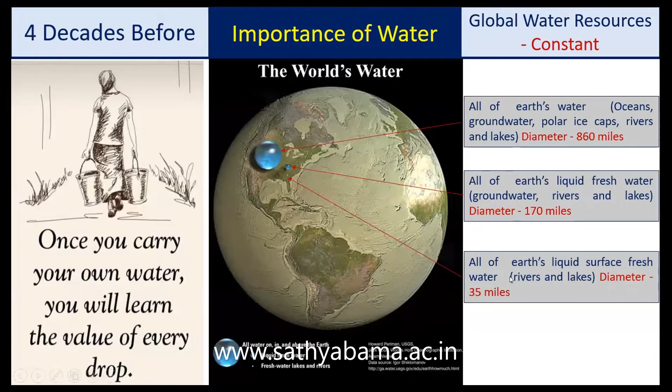Now, the other part of the importance of the water source: if you assume the total water available in the world is 100%, nearly 97.5% is salt water, and only 2.5% is fresh water. Within the fresh water, approximately 80% is glaciers, and 20% goes to groundwater.

Within that, you have lakes, rivers, and soil moisture. Then further, water vapor and water in rivers and living organisms, so we are enjoying water only from rivers and lakes. So you see, from 100%, what a meager amount we are having and enjoying for so many years.

If the entire 97% of water available in the ocean were fresh, potable, drinkable water, we would never talk about the water source at all. Whenever any commodity or resource becomes scarce, only then do we talk about its importance. In such a way, the water source is also one of the scarce resources for the growing population and industrialization.

So this is the indicator: the global per capita water availability. If you see here, California, Canada, South Africa, Brazil are rich in water source, and even China and the northern hemisphere. But in India, we are almost in the stress to scarcity zone.

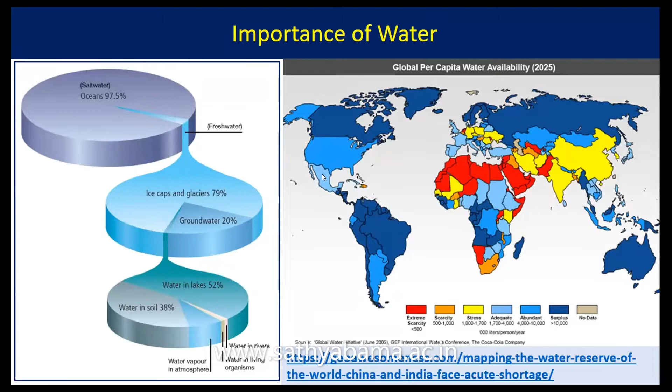But is it going to be an increasing trend or a reducing trend? That's a question mark. But due to technological and human interventions like construction of additional dams, canals, aqueducts, and pipelines, we have somehow managed to bring the original stress condition to an almost manageable state.

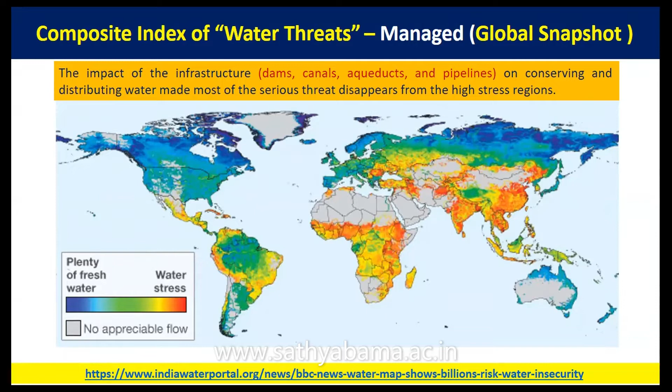But still, population growth is one of the hidden threats. The demand is directly proportional to industrialization as well as population. Of course, population growth is the main cause for food security, industrialization, and so many other commodity demands.

Then the consumption of water can be classified into two ways. One is consumptive use, the other one is non-consumptive use.

Suppose you have a glass of water and you use 50% or 70% of it. If you are not using the remaining water, it goes to waste. But whatever you consume, say 50%, is called consumptive use, which is not available for the hydrological cycle immediately.

What I mean is, suppose this water you are drinking, a portion will be used for your blood cell or body cell development. Or if you use this water for plant growth, not all of it transpires. Most of the water will be used by the plant for photosynthesis as well as plant cell development. That water will remain with the plant or the human body cell until it lives. Once it dies, it goes back to the hydrological cycle.

So for the time being, this is called consumptive use, which is not readily available for the hydrological cycle, but it is still part of the hydrological system.

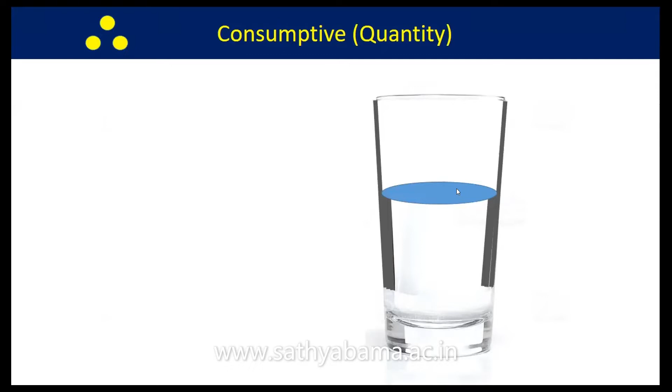Therefore, it is very important to use water judiciously without wasting it. This is not a new or future picture, it's already been experienced by most of northern India, like Gujarat, Rajasthan, and so many other places.

So kindly don't waste water. Whatever is possible, pour only that much into the glass and drink it. Make it a habit to keep your glass empty wherever you go.

In terms of quality, though we have water, if you try to pollute it, it is still not usable for drinking, agriculture, industries, or any other purpose. So though the water is available, it is not available for usage, which is also a kind of consumptive use, or you have consumed it. It is not available, but it is still part of the hydrological system.

This is the present situation the world is facing. We had water in rivers, lakes, and so many places, but we have started polluting all rivers and lakes, most of developing nations have started polluting the lakes and rivers.

Now we are using technological measures to treat and drink it, like desalination, RO, primary treatment, secondary treatment, tertiary treatment. So rather than eating straight away, we are eating after rotating the hand across the head, so to speak.

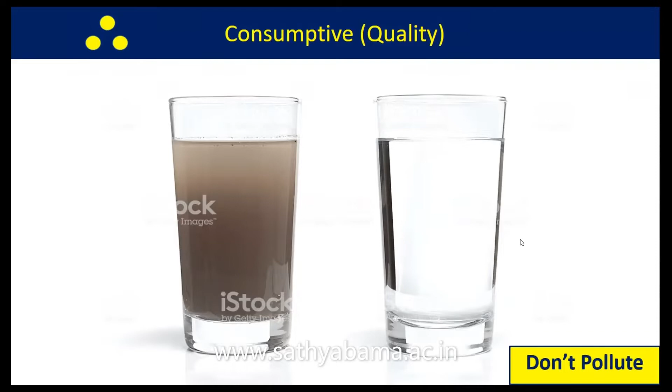If you make a fair judgment on utilizing water and keeping it as a precious resource, and make sure you are not polluting unnecessarily, then the resource will be saved and water management becomes very easy. So therefore, don't pollute. Now this is the global domestic, agriculture, industrial and domestic sector consumption.

This is one of the interesting pictures you can see. You can live in the world without a car, without gadgets, electronic items, or luxury items, but you cannot live without water and food. If you see here, India uses almost 93% of its water only for agriculture, and domestic and industrial use is very low.

If you talk about developing versus developed nations, like Germany, USA, Europe and UK, these countries are highly developed in terms of technology, and you rarely find them producing food, but their industry is huge. That means they produce technology, sell it to other parts of the world, and take food from countries like Southeast Asia.

If you see in this zone, most of the water is utilized only for food production, and the Western countries enjoy their lifestyle by taking food from us, while we enjoy a so-called luxury lifestyle by taking technology from the West.

So there is an imbalance of usage of water. What I'm trying to say is the importance of what is called virtual water trade. If you use 1 meter cube of water for producing an agriculture product, let's say paddy, you can produce 1000 kg of grains, which cost nearly 10,000. But German or Western people will use the same 1 meter cube of water and sell their product for 25,000 or 50,000. So the same water used here sells for 10,000, and there for 20,000, 30,000, 40,000. That means water is made into an economic good.

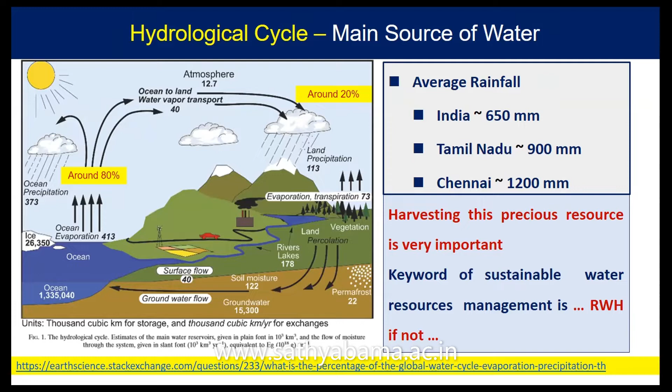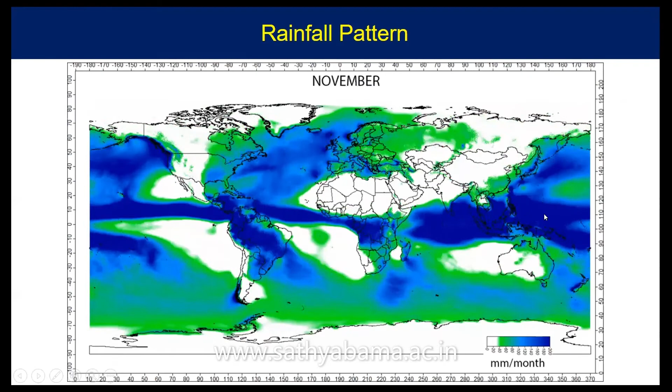So this is the rainfall pattern across the globe. You can see, right from January to December, the maximum precipitation occurs almost like at the equator. That's what I said - across the whole globe, either the rainfall or the drought generally takes place near the equator.

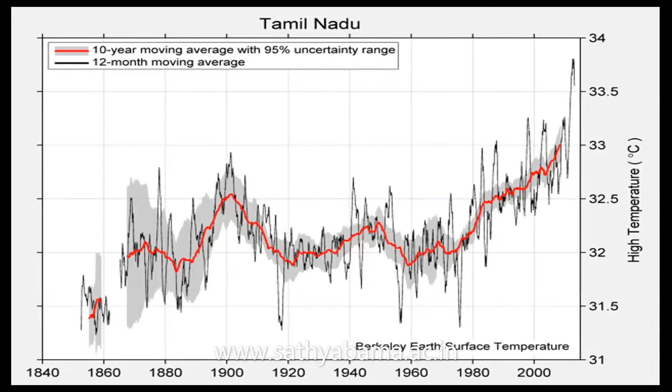Maybe I'll show you some glimpse of the impact of temperature rise, nothing but global warming, on water resources.

The total water surface available in Tamil Nadu is from 17 river basins, and we normally refer to it in terms of 1 TMC. 1 TMC is 1,000 million cubic feet, that is 10 to the power 9. That is the unit we normally use.

In Tamil Nadu we have 17 river basins, estimated as 850 TMC. From all of this, we have 39,000 tanks catering nearly 347 TMC, 79 reservoirs in terms of dams contributing 240 TMC, interbasin transfer contributing 261 TMC, and other storages contributing 2 TMC. Whereas the surplus water from the 17 river basins goes to the ocean without conservation, estimated at 177 TMC. The annual average potential was estimated as 1643 TMC in 2001, but the demand was 1921 TMC.

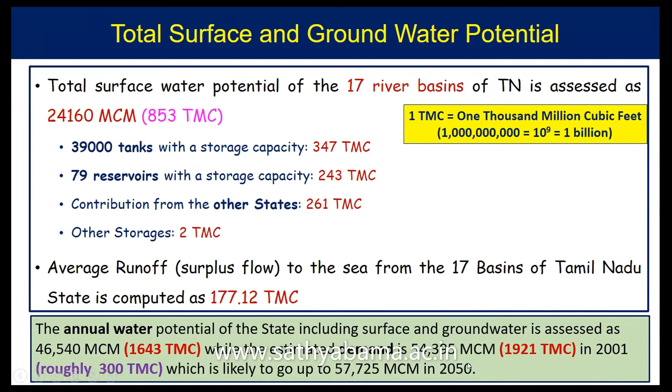There was a gap of 300 TMC in 2001 itself. This gap is likely to exceed up to 57,000 MCM by 2050, due to globalization.

This is the drought-prone area of Tamil Nadu, generally Ramanathapuram, Dharmapuri, and other northwest regions of Tamil Nadu, while the southeast of Tamil Nadu is generally...

Excuse me, can you wait for a minute? Yes, sir, yes, sir, we will wait. No problem. I'm really sorry for the inconvenience. No problem.

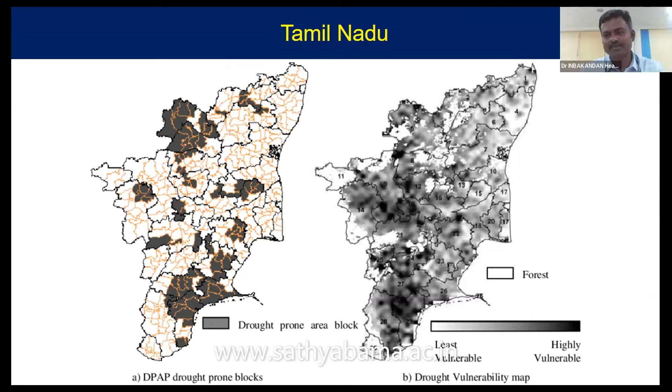Right, so this is the drought portion of Tamil Nadu. And if you see here, across India, this data is released by the Central Groundwater Board.

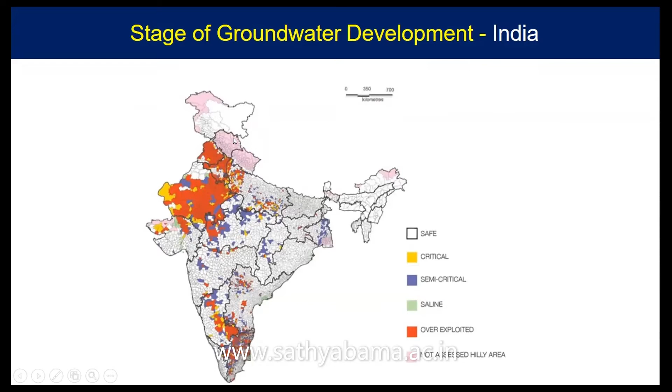Punjab and certain portions of Telangana and Andhra Pradesh are highly overexploited, because in the 1980s the borewell concept came into picture. In Punjab, these wells were highly utilized through the borewell concept, and these are the highly exploited blocks as of now. Other portions of India are mostly semi-critical to critical.

Now, the various water users: if you see here, irrigation involves farmers, domestic use is by local communities, industries use water for their purposes, and there's also the recreational aspect, generally for tourism. Without water, tourism will never flourish.

For example, Netherlands is meant for tulips, and we have a lot of canals there. If there is no water in the canal, there is no tulip. Similarly, if there are no trees in Ooty or Simla, or no snow in Kulu Manali, then there is no tourism. So water plays an important role in tourism development, which gives refreshment for human health.

Another important aspect is environmental flow. In the National Water Policy of 1987, we never had national environmental flow as a component, but when it was revised in 2012, environmental flow became one of the major and mandatory components included in the National Water Policy.

The importance of national environmental flow in the water policy is that if a river does not receive or carry a minimum flow for at least some portion of the year, the flora and fauna existing in the river system may disappear over time. So to ensure that the flora and fauna, which are fundamental to any ecosystem, are taken care of, a minimum environmental flow must be ensured so that the ecosystem is saved.

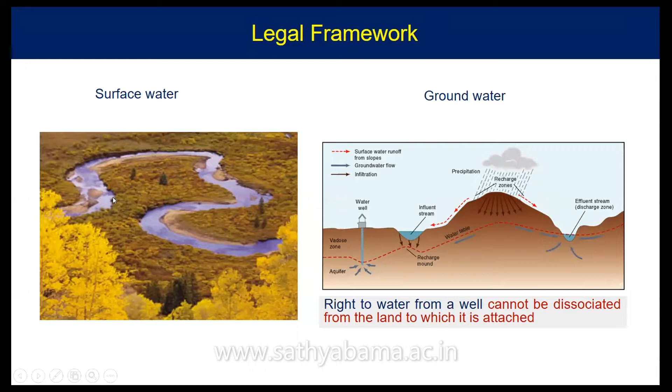The difference which is available, and the land right—your groundwater right goes with the land right, whereas your surface water right never goes with the land right.

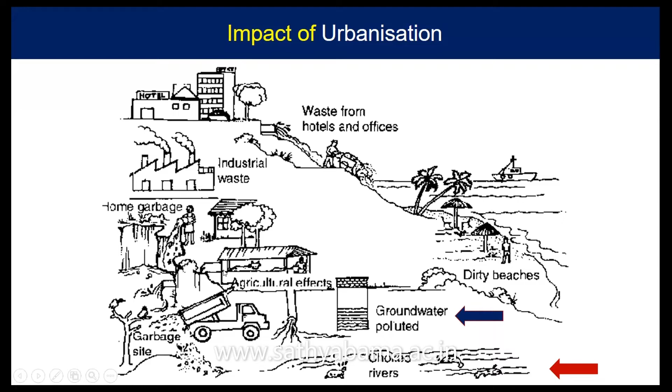Regarding surface water pollution, the river generally has a tendency to show an oxygen sag curve and recovery curve. The dissolved oxygen (DO) level of a healthy freshwater river system is typically 8 to 9.2 ppm or milligrams per liter. If the DO level goes below 2 ppm, the fishes and flora and fauna will die, and the system becomes a dead system. The DO level of a river or lake system should not go below a certain extent.

But nature has a gift: if you don't pollute for a certain period, the system has a regenerating capacity and will come back to its original shape. You must wait for that. Otherwise, if you dispose of another pollutant source, the curve will decline again, and the river system or ecosystem will become a dead ecosystem. This is one of the biggest problems in developing nations, especially countries like India, China, and other Southeast Asian nations.

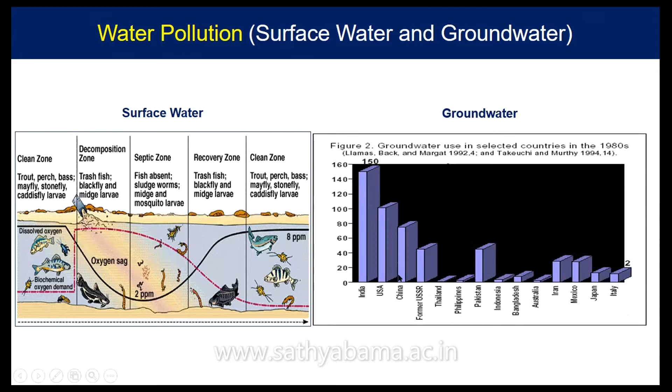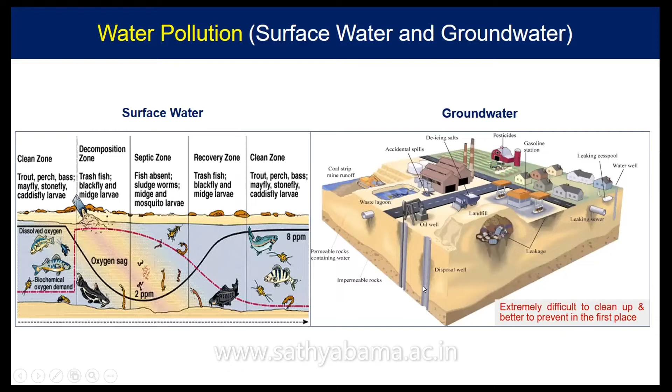Regarding groundwater, India is a pioneer in using groundwater sources, while other countries use much less. Since we use more groundwater, we are also polluting it through improper disposal of liquid as well as solid waste. It is extremely difficult to clean up such a system, so it is better to prevent pollution at the beginning.

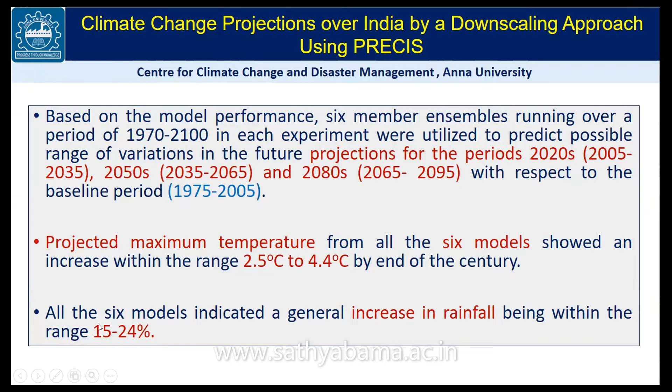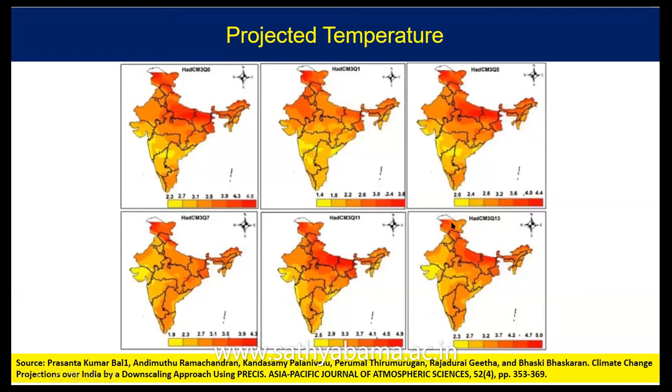The projected maximum temperature from all 6 models showed an increase of 2.5 to 4.4 degrees Celsius at the end of the century, based on this projected result. Apart from that, rainfall increase was also observed, from 15 to 24% in most of the Indian context. This shows the temperature projection from the baseline to the projected period, 2.5 to 4.4 degrees, and the rainfall pattern increase from 15% to 24%.

If you talk about the climate change impact, the Krishna, Godavari, and Ganga rivers are the maximum benefited river systems, in terms of rainfall increase or annual flow increase in the river.

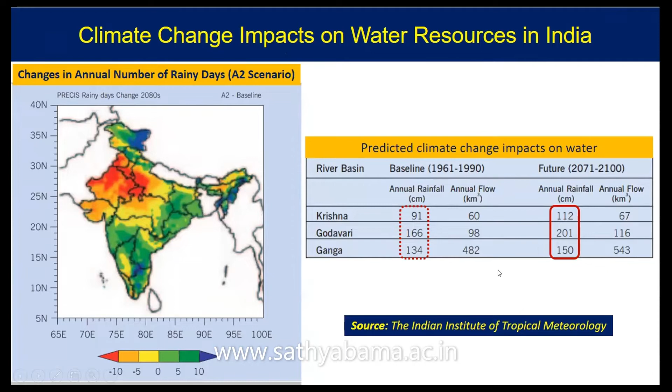Now coming back to South India, IIT Madras along with Tamil Nadu Agriculture University carried out a study to assess the likely rainfall scenario in mid-century using a climate model with support from Norway and the government. They used GCM and brought it down to RCM level, which was run by the International Pacific Research Center in Hawaii, with 25 kilometer resolution, by doubling the CO2 emission value.

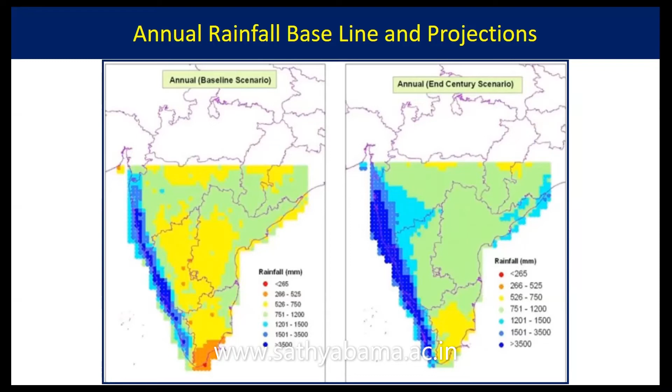And here you can see the western coast is highly benefited by the rainfall, by the climate change. And this is the other thing, at the end of the century.

The number of rainy days is reduced by half. For example, in the baseline period, in a year, if you get rainfall on near 90 to 120 days, maybe at the end of the century you will get only 45 days maximum. Within that, you have to conserve and utilize the water.

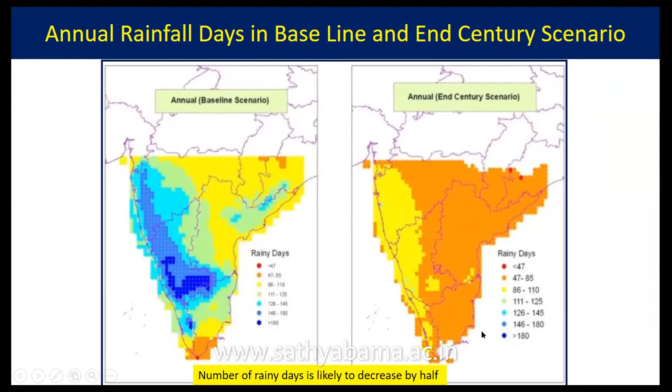The other way, the intensity also changes. Intensity means millimeters per day. Initially we had like 7 to 10 mm, now it's going to 11 to 12 mm, or 7 to 12 mm. There is an increasing trend in rainfall intensity also observed by the end of the century.

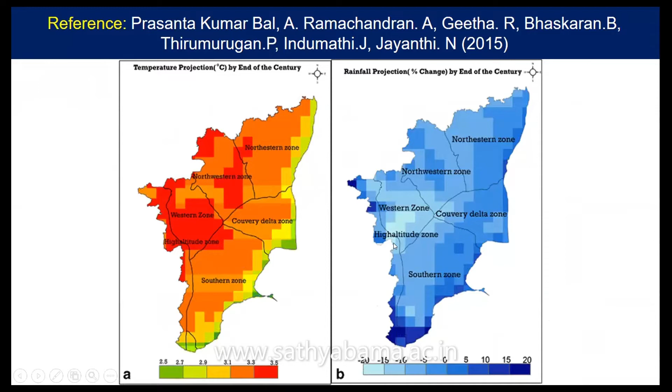So that means in Tamil Nadu, the east coast has an increasing trend, whereas the west coast has a declining trend in terms of rainfall as well as precipitation. So this is a summary of what I already said.

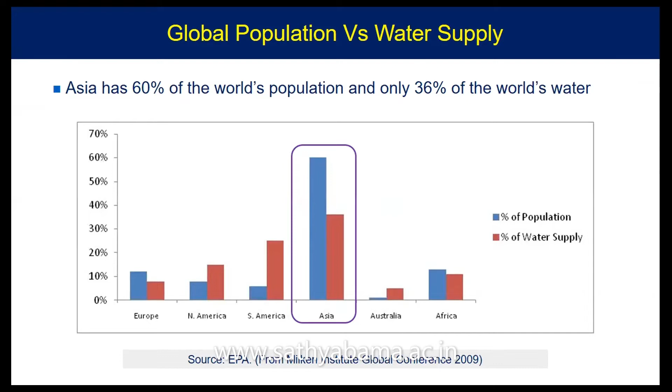Now if we come to Asia's water availability - world population versus 36% of world water is available, and see the demand in 2050. The huge gap existing between population versus supply is one of the important indicators one has to think over, to manage water supply to meet the entire population without any deficit.

So therefore water management is becoming an important commodity. It is basically active planning, development, distributing, and managing the optimum use of water resources, which is the important commodity.

Whereas it is not that easy, because any water management involves physical science, social science, and basic science. That means you require interdisciplinary people to make a decision, like geographists, geologists, economists, social scientists, physics, chemistry, biology. So bringing everybody together and addressing the issue is the biggest task.

That's what in recent days they renamed as the IWRM concept, which is called the Integrated Water Resource Management concept.

Water management has different dimensions. You must address water resource management in terms of equity, efficiency, sustainability, legitimacy, accountability, subsidiarity, and participation. These are the different dimensions that water resource management generally has, and you must address all these issues.

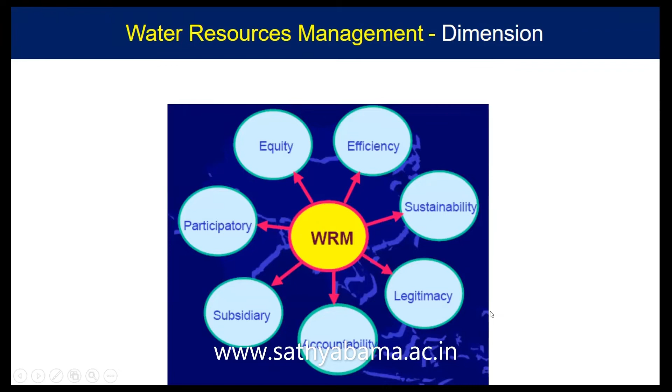Coming back to some of the management measures - a shift in thinking is required to manage water resource management, moving from simple water management towards sustainable management. As I said, the concept of IWRM, Integrated Water Resource Management, needs to be inculcated or introduced into water management practice. Then the blue-green water concept must be taught at all levels for conserving water. Surface water management, wastewater resource reuse is the future - it is the order of the day, you cannot escape from this. And if you are not doing proper management of the above items, then stormwater management becomes necessary.

And the new principle, right? The new principle of sustainable water management planning is to identify and meet the basic human and ecosystem needs.

One has to treat water as a basic need in terms of food self-sufficiency and self-reliance. So water must be treated as an economic good. Only then can you meet both these points.

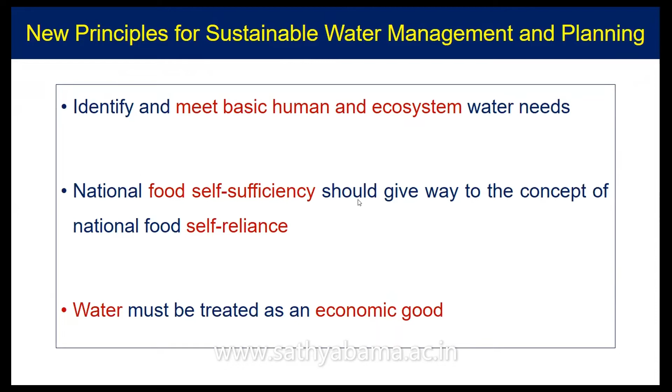To address all these issues, the IWRM concept is the recent concept, called the normative concept. It is an ideal concept, bringing political, engineering, social science, economics, and environmental people together to make a better triangle, a better water management system. So policy, legal regulations, aquifer and river basin management, central and local assessment information, so many things come into the picture. IWRM is the recently practiced concept for water management.

Then blue-green water is another concept. When precipitation takes place, generally 65% goes as evaporation and evapotranspiration, and 35% goes as runoff. We cannot do much about this apart from constructing check dams, dams, reservoirs and other structures. But you can conserve some percentage of the green water, which goes to the atmosphere through green cover in terms of evapotranspiration.

So if we try to change the agriculture practice, the cropping pattern, from high water-consuming crops to low water-consuming crops, then you can conserve at least 5% of water in the green water, which is a huge saving for the entire globe. So conserving water by changing the cropping pattern plays an important role in water management for any river basin or any country.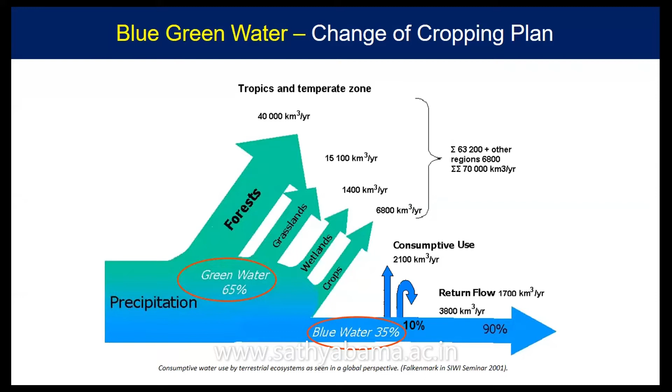In entire Tamil Nadu, we have 39,000 tanks, and if we use these tanks properly, we never face water scarcity at all. This is one of the indigenous geographical features that South India has. Nowhere else in the world is this kind of cascade of tanks available. We must be thankful that they were given to us, but we have to use them properly to conserve rainwater whenever it takes place. I'll come back to the Urani later.

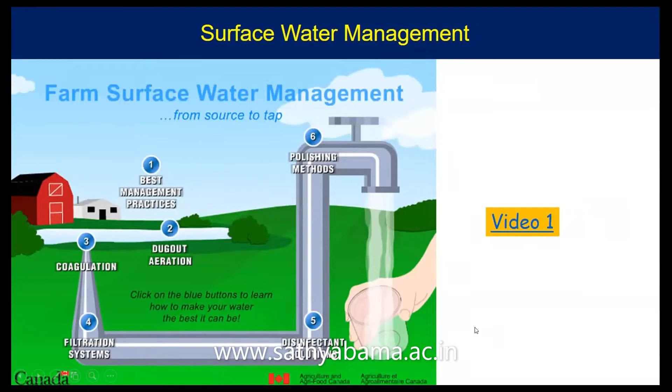I have how much time? No issue, sir, you can continue. Okay, right, you can.

Now these are some traditional rainwater harvesting methods practiced in India. The Zing in the Ladakh region, and the Kul in Himachal Pradesh. Likewise we have methods in Uttar Pradesh. For Nagaland, it's the Zabo. So in each part of the country, they practice rainwater harvesting under different names. For example, in Tamil Nadu it is the Urani. In Kerala, it is the Surangam. In Gujarat and Rajasthan, it is the Kunds. So this is practiced across the country, but we are often not aware of what it actually means. Just Google it and you'll get a beautiful image of each one.

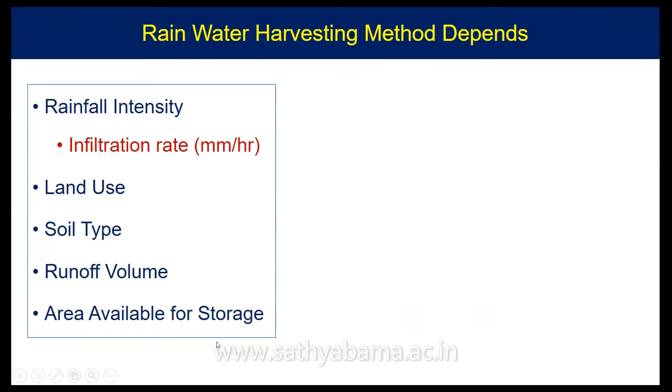One has to understand how much soil infiltrates, how much runoff will generate, how many storage structures are available, how much water you can store, or how the excess water can be stored nearby. Those kind of activities you can take up.

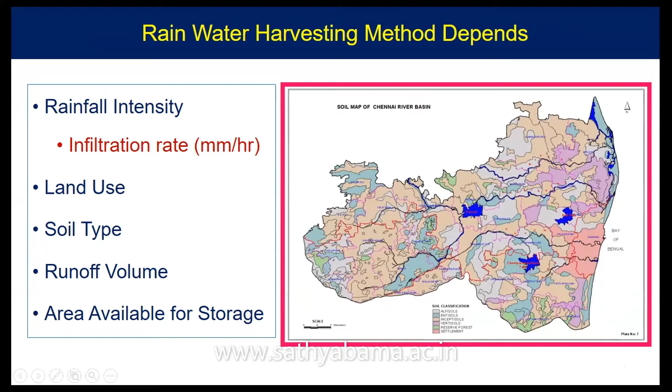When it comes to groundwater management, we have artificial recharge, groundwater protection zone management, subsurface reactive barriers concept, and pump and treat injection system. These are the management strategies.

In case of artificial recharge, you can improve water quality by injecting treated wastewater, and you can dilute or push the salt water into the ocean and prevent seawater intrusion through injection.

Coming back to wastewater reuse as an option - as I said, if you are not doing rainwater harvesting properly above, there is no other option. We have to depend on technology and use it, because the world wants to push technology to the consumer and make the public addicted. So if you are not following the traditional practice, then you must fall in line and do wastewater reuse.

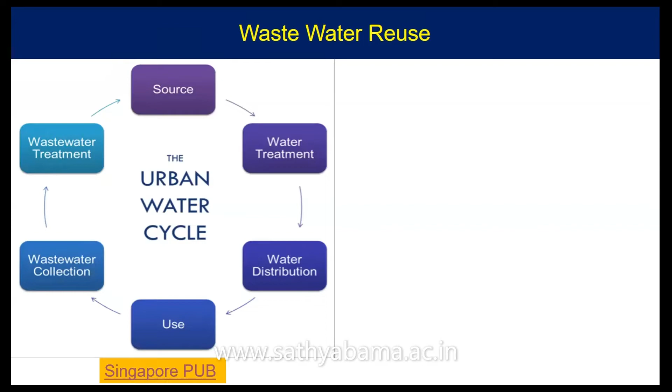Let me just check whether this video is playing. Is it coming? Video visible? No sir, it is not visible. If you stop sharing that, I think the video will play - stop share. And while sharing, we need to click the bottom two rectangle boxes also, for audio. Is it visible now? No sir, only the PPT slide is visible. You have to completely close this PPT, sir, then only we can see the video. You can stop share, then start share again. Sorry, it is not coming, I don't know.

Or you can take the video on the desktop. What's the name of the video, sir? Maybe it's hyperlinked - oh, you hyperlinked it in the slide itself, right? Must be here.

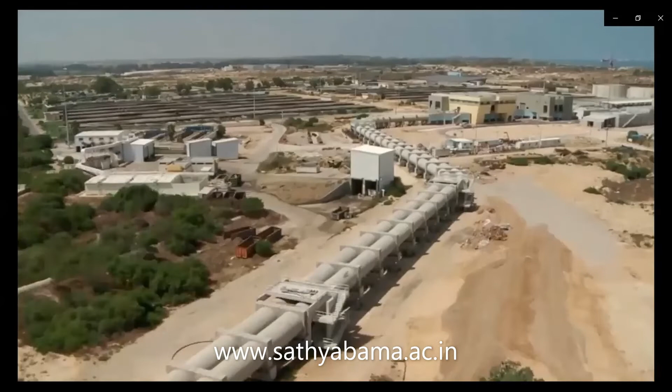It is a water saving technology in Israel. We recycle 85% of the wastewater, which makes us a world leader in water reclamation. We can create this agriculture to the south of our country with water coming from wastewater. Wastewater is so important and critical for us, being an arid, semi-arid region, we have to use wastewater resources for irrigation. We take the wastewater from our homes, bring it to wastewater treatment plants, and use 80 to 85% of our domestic wastewater for irrigation and agriculture. This is the highest number you can find in the world.

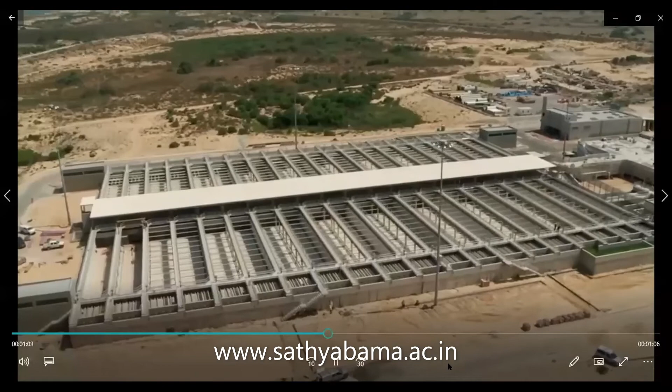We're collecting the wastewater from 2.5 million people in that region, the center of Israel. We're bringing it to the Shafdan, one of the world's largest water reclamation plants, and we recycle 99.8% of the wastewater back to the level of potable water that you can actually drink, shower, or use for agriculture, as we do. We collect the wastewater through big pipes.

They come here. We take out the solids, recycle it, and then into the wastewater we insert microorganisms. The microorganisms digest the organic material and purify the water. At this moment we get effluent of very good quality, but for unlimited irrigation.

We believe that the experience gained in Israel in the different directions of being more efficient in water use, saving water, and producing water from new resources can be shared in many regions in the world.

Right, so now my PPT is visible. So this is the technology, and the annual average rainfall in Israel is less than 400 mm. So when they are capable of doing all these things, why not other countries also, right?

So they are the pioneers because they want water. They buy it from nearby countries as wastewater as a source, and they treat it and use it.

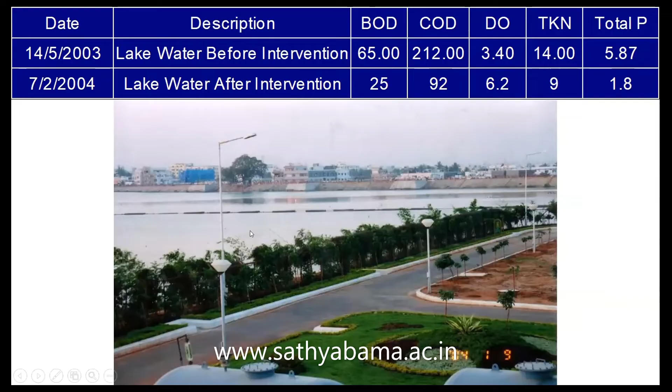Then upgrade the sanitary fixtures to consume less water, and eliminate single-pass cooling. Don't allow the water to exit from any industries after a single usage. They have to use it multiple times, do multiple processes, then only let it out.

Incorporate landscape irrigation and reduce steam sterilizer tempering water. Again, it's almost similar to eliminating single-pass cooling, and reuse culture must be in practice. Control reverse osmosis system operation—we should have a good RO system with membrane technology so that we minimize the RO reject from the water plant.

As of now, we have 40 to 60% as a reject. We should have 90% water purified and 10% reject. Then that is a good RO system.

And recovery of water—as I said, rainwater will come into the picture. Then finally, the recovery of air handler condensate. In recent days, some people are condensing the air moisture, converting it into water as droplets.

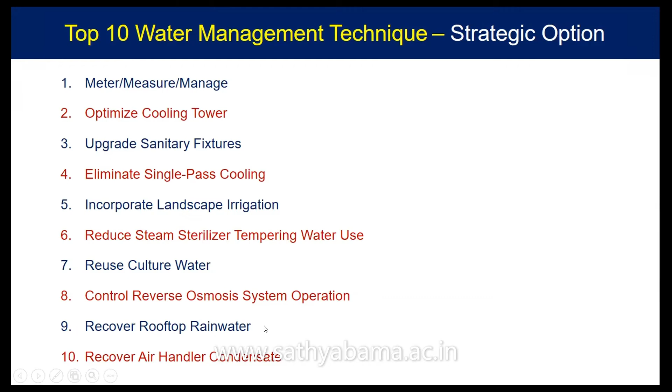So this is the metering advantage—you just meter it, and basically you have a sensor. The sensor will tell you the soil moisture. Once the soil moisture reduces, the irrigation will start. Otherwise, you flood it and unnecessarily make irrigation. That is the basic concept of meter usage and consumption.

Then the optimized cooling tower. In those days we had wooden or concrete-based cooling towers, which consumed a lot through leakage and other issues. Now we have composite material cooling towers, which consume less water for cooling and other purposes.

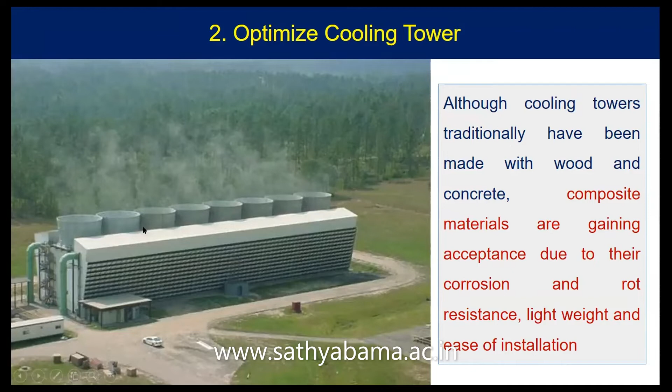Then the sanitary upgrades—in recent days, almost all accessories are giving nearly 40 to 100% savings of water. Let's say a water tap goes from 10 liters to 6 liters per minute, that's efficient. As technology increases, we must also go with the technology; only thing is, you have to pay for it.

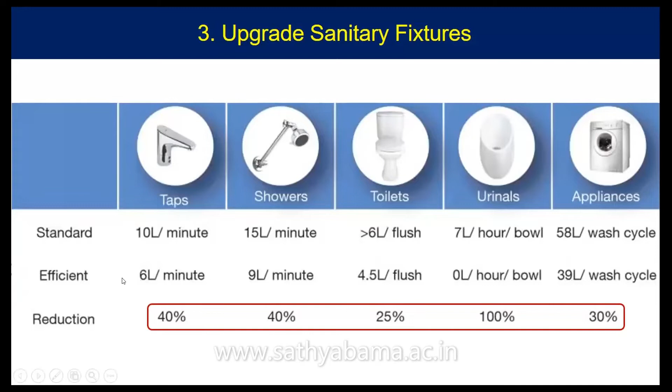And one of our alumni from MIT, his name is Arun, has developed a nozzle which converts a single droplet of water into n number of droplets of water.

The concept is to bifurcate a single droplet of water into n number of droplets, so that small particles fall on the hand before you wash freely. What the hand actually requires is wetting, and for wetting you need not have a bigger droplet. Only a small droplet is sufficient, like the sanitizer machines where you show your hand and it sprinkles - that is sufficient, rather than pouring water on the hand and wiping it. This invention proved a 90% saving, and now most hotels are using this kind of technology. It was patented recently, maybe around 2000.

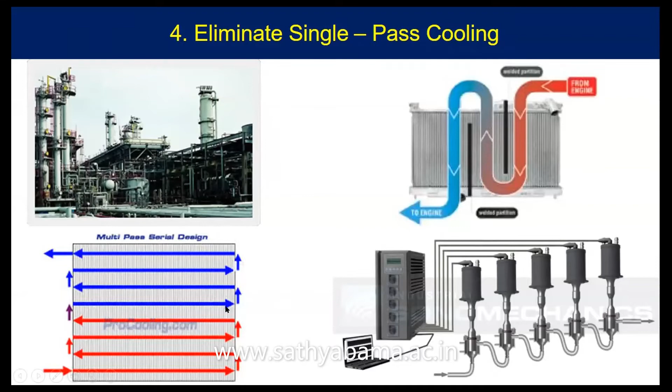Eliminate single pass cooling, you must repeat the cooling process several times. The incorporated landscape irrigation practice is one of the best practices which Sathyabama is following.

We collect all the wastewater and have a treatment plant near our environmental department, with dedicated faculty to treat the water and maintain its quality, ensuring it is treated to at least agriculture standard. Most gardens in the campus are irrigated only by treated wastewater. A couple of years back, at the Srirangam temple in Trichy, the entire lawn and gardens within the temple were grown only using treated wastewater generated within the premises, and those flowers were taken to the god. You can Google it and find the video.

Then there's reduced steam sterilizer tempering water use - as I said, you must use advanced technological instruments to minimize water, and you can save 30 to 40%.

Then the reuse culture, as I already said, you must collect water from the restroom, toilets, and cafeteria, treat it and filter it, and use it for toilet flushing.

In recent days, most CMDA authorities are giving permission for buildings only if you have a dual pipeline system - one for domestic purposes, and the other for flushing and urinals, wherever physical touch of water is not ensured. There you can use treated wastewater. So they are insisting on dual pipeline systems in most apartments.

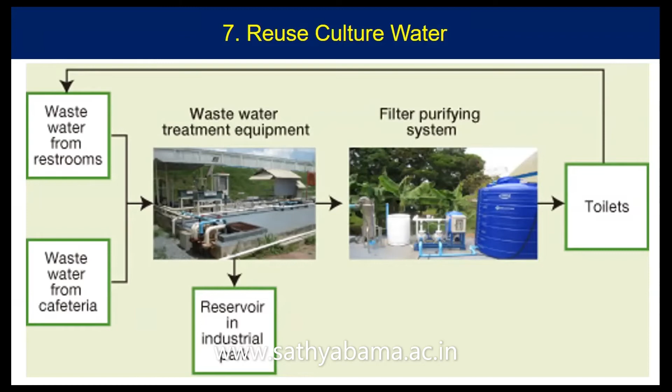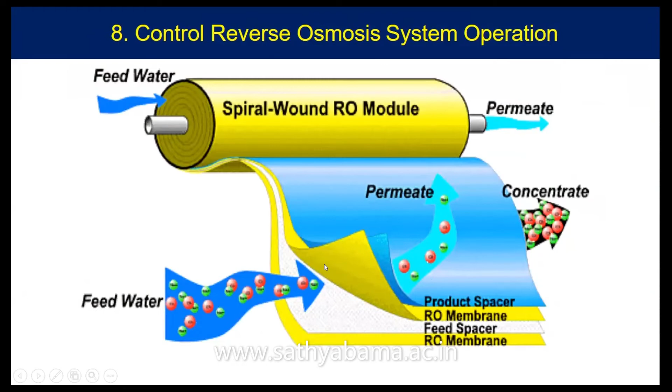As I said, you must have a good RO system and membrane system to minimize the RO reject, because the RO reject is the brine and it has a lot of impact wherever you dispose it.

Recovery of water from the rooftop - if you talk about Karaikudi and some Chettinad areas in Tamil Nadu, that is the best place to make as a model for rainwater harvesting. Even scholars from France and Germany come to do research on the rainwater harvesting practice being practiced over time in Karaikudi, Chettinad houses.

So if you try to harvest water from the roof wherever possible, store it at ground level and use it whenever you want. Even Shivakumar from Bangalore, who I think is a pioneer in rainwater harvesting, is a known friend of mine, and he built his entire house depending only on rainwater throughout the 365 days of the year.

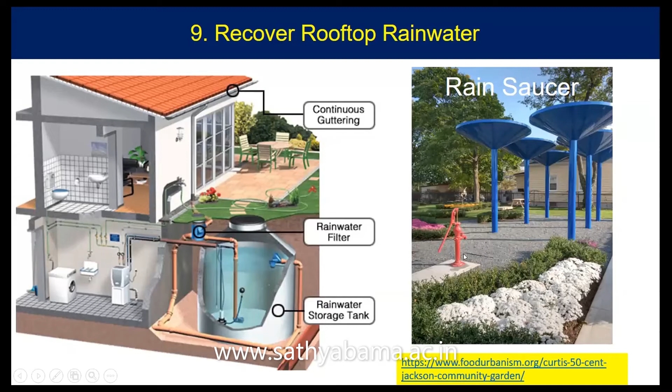If you are not doing this, there's also a recent technology called the rain saucer, for use in parkings. Instead of an umbrella-like shape that protects from the sun, it's reversed - it still protects from sun but also receives and collects water for use in the garden. This rain saucer is currently used in most developed nations for lawns and gardens, and to a certain extent for other demands, so you need not irrigate - it automatically takes care of it.

You can collect and use this water too. In 2000, Richard Heinichen proved to the world that bottling water need not always come from extracting groundwater - he proved that the bottled water business can also be done by harvesting rainwater from the roof.

As I said, the rain saucer harvested water from 1,000 square feet of land or rooftop, with a 3 cm rainfall yielding 2,000 liters. It was given a mild treatment like UV treatment and reverse osmosis before packing, making it wonderful potable water, the most wanted or preferred water because it's virgin water.

There is no contamination because it was just collected from the atmosphere a few hours earlier, so it's the most preferred or demanding water. In fact, each 500 ml bottle of water contains 53,300 droplets within it. And you can save so much water even in a small area of 1,000 square feet.

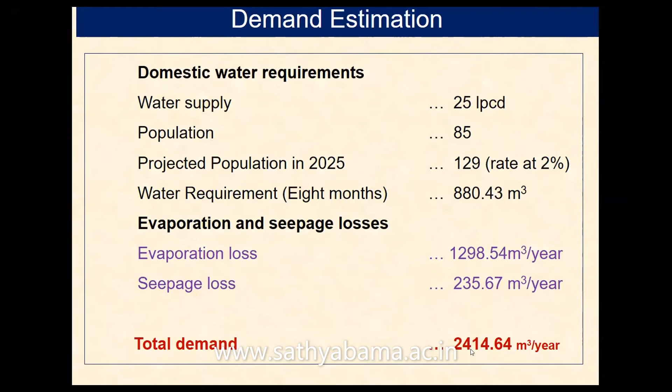The Oorani was jointly done by the Government of Tamil Nadu, CSCWR, and DHAN Foundation, and basically we designed it. We took a small Oorani in Kancheepuram district near Chengalpet. We estimated the total demand of the village is 3,000 something, and for 9 months the demand is 2,400 meter cube per year.

This is before renovation. We took only 9 months because the remaining 3 months fall in the monsoon period. At the same time, the design will take care of the water demand.

We did an engineering survey for the tank, and the contours were obtained from GPS. We demarcated the contributing area, noting the different land uses, and recommended fencing for these areas to avoid illegal activities.

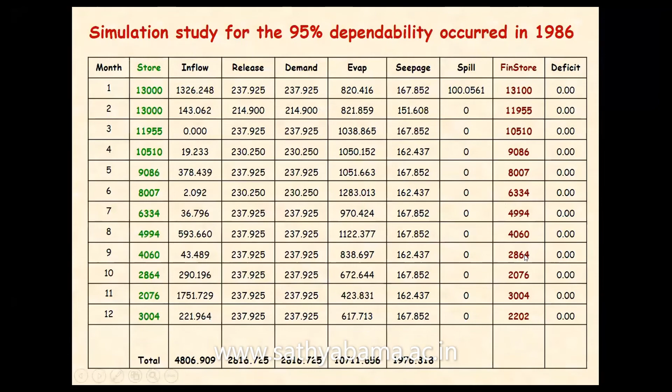We also did a simulation including inflow, storage, evaporation, and all other losses. At the end of the 9th month, our tank will have 2,800 cubic meters of water, whereas our requirement is only 2,400 cubic meters. Therefore, our design is very safe.

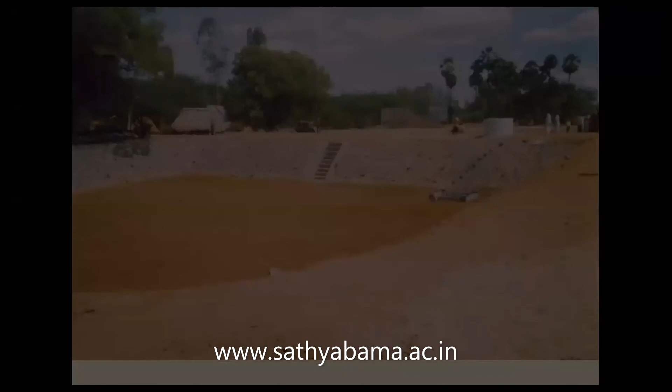This is after rain, showing the silt we have trapped, which needs to be cleaned periodically. And this, after rain, you can see it looks like a small swimming pool, shown in a long view.

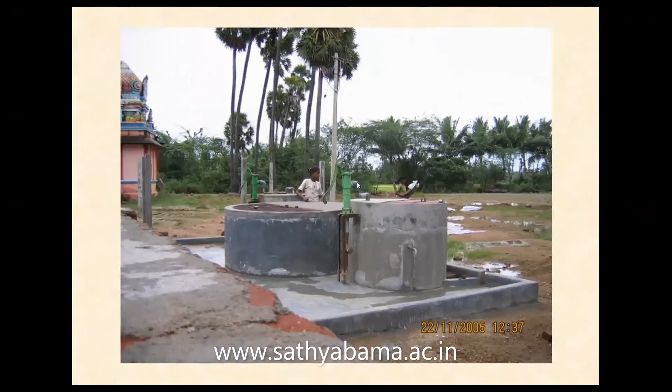This is the inlet to the tank, and the public is allowed to take water from the well, which is constructed near the tank bund.

So these are some photographs of the tank. This is the overall view, and it looks almost like a big swimming pool. It is a model pilot project and one of the most prestigious projects for the Tamil Nadu Rural Development Department. They call it our pride project, and of course, we are part of that.

When you see how much one tank contributes to the village, and we have 39,000 tanks, you realize you can do a lot of wonder in Tamil Nadu.

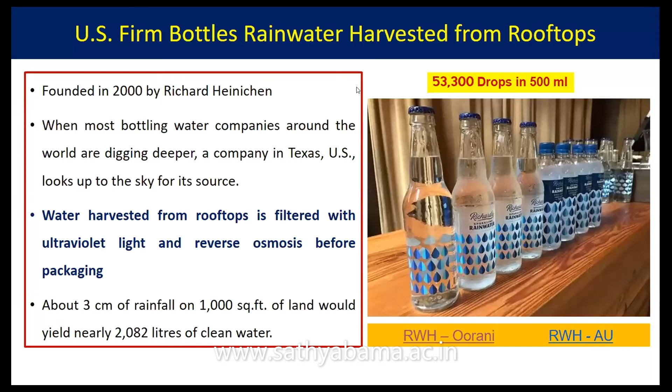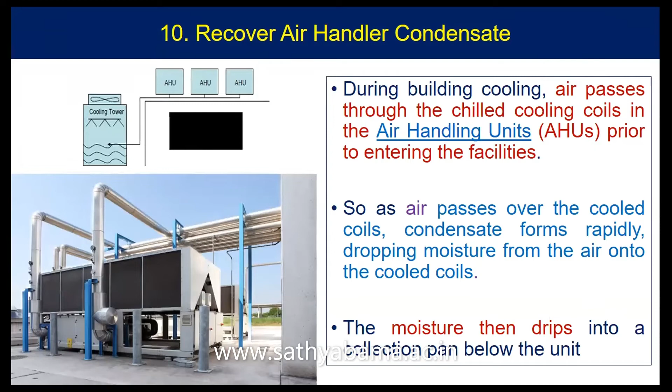The recovery of handlers, air handling is nothing but you must conserve or absorb the water available in the atmosphere in terms of cooling towers, which is against nature. I can tell you that for want of time you can do it, but it is not a good practice as far as the hydrology cycle is concerned. You are imbalancing the hydrology cycle.

Some of the case studies are listed. The Oorani case study is already completed. This is the Mahindra City case study, which is a wastewater management project we did from the Center for Water Resources.

This is Mahindra City, on NH45. The blue colors are the water bodies, with about 9 water bodies available. They want to develop industries and IT parks, and we have given a wastewater disposal plan.

This shows the lakes around Chengalpet, and they want to develop in all the blue, purple, and orange colored zones. These are the reserve forests available on the highway land near Chengalpet, before Chengalpet, and these are the different zones coming into the plan.

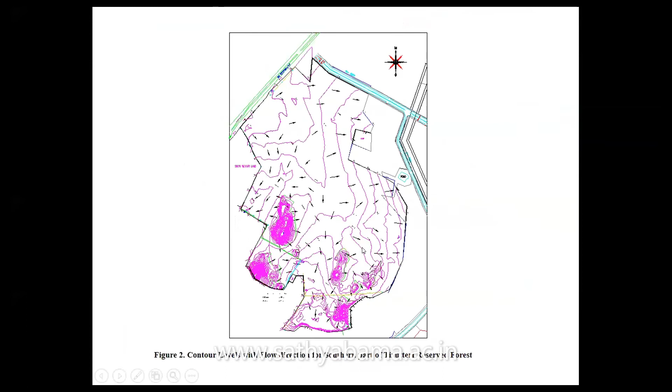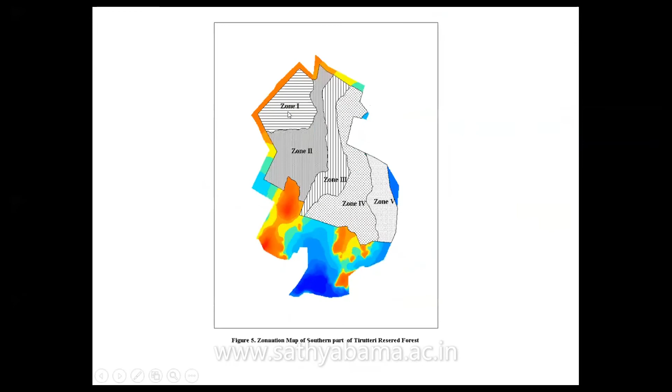We did a contour survey, and there are small hills within Mahindra City. Based on the contour, we divided the area into 5 zones for wastewater management, and all the wastewater generated will be collected, stored, and pumped into the highest peak point.

From there, we irrigate zone 1 on the first day, zone 3 on the second day, zone 5 on the third day, zone 2 on the fourth day, and zone 4 on the fifth day. We leave one zone as a gap for irrigation, so the irrigation water will not seep into the next zone. When you come back to a zone for irrigation, it takes a week.

By that way, the wastewater generated within the campus is being managed effectively for garden development and landscaping purposes.

Actually, now back to the case study.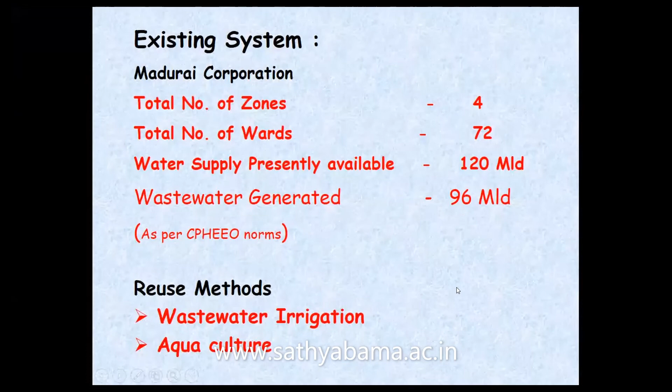The wastewater irrigation system is one of the important practices in Madurai, called the French drainage system, where most of the wastewater generated in urban areas is collected, stored, and pumped into urban agriculture. I'll show you this French drainage system.

The wastewater generated is disposed here, and the plants uptake all the nutrients, so only treated water comes out here. This water is then available for agriculture activities, as well as fish culture and other practices.

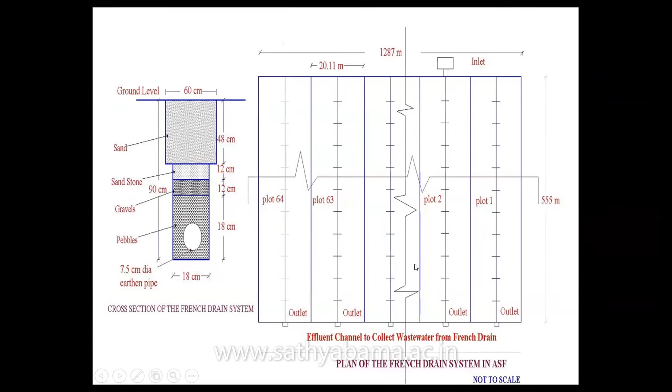This drainage practice was developed by the French almost 90 years back. At the top you have sand and pebbles, almost like a filter they designed more than 90 years back, and it is still working perfectly. These kinds of techniques are required across urban centers to effectively manage urban wastewater reuse.

The bubble technology is one of the commendable works done by some of my agriculture students, on water savings by hydroponic bubble technology for conservation, basically to conserve urban wastewater for urban agriculture.

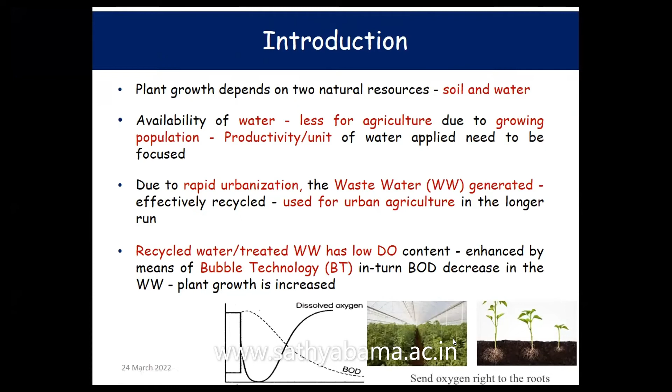What is lagging in urban wastewater is nothing but the DO, the dissolved oxygen, whereas BOD is present, DO is lagging. Once you try to improve the DO in urban wastewater for agriculture, you can do wonders. For this, we adopted bubble technology.

We did this for urban agriculture in the plant area. I'll show you the methodology. We took water from the Sathyabama treatment plant for the bucket porous tray setup.

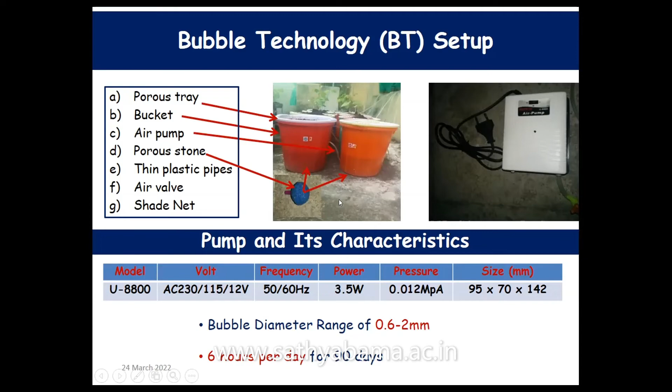We took fresh water and wastewater and did a combination of these, using a tray planted with different vegetables grown as a nursery and then transplanted. We also did a water quality analysis, and all the parameters were within limit except DO.

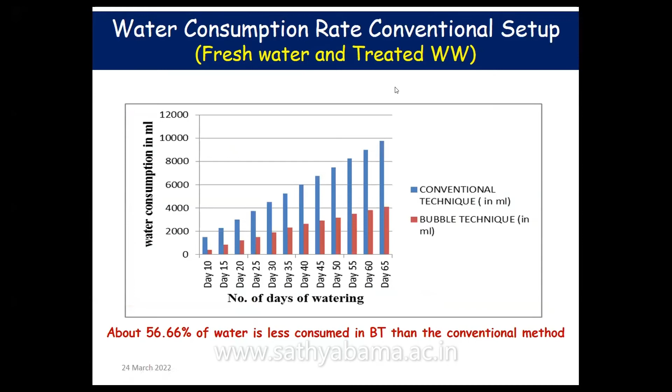The water consumption and conservation setups are also there. This is the whole setup.

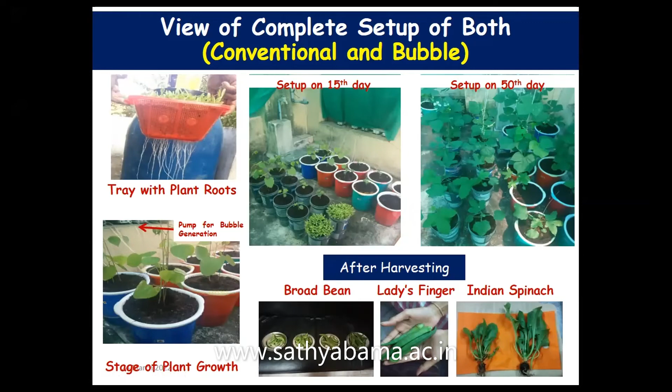So there is a lot of benefit in the wastewater, only thing is the DO is less. To improve the DO, we introduced bubble technology, which generates bubbles and re-aerates the water, supplying fresh oxygen into the root zone. By this way, you get a good water potential.

These are some of the comparisons, which are highly technical and which we have published. We conserved nearly 40 to 50% of water through this.

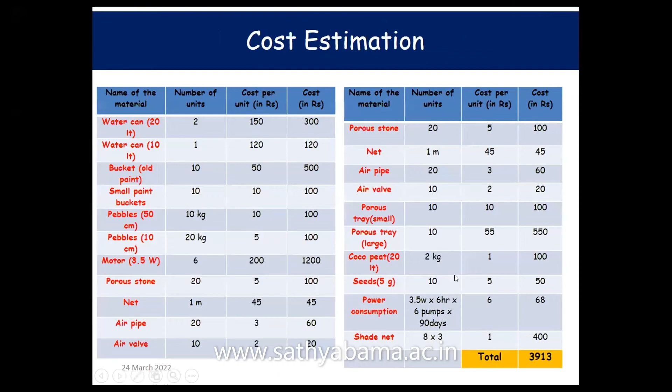If you take the parameters comparing bubble, freshwater, and wastewater, the cost for setup is roughly 4,000 per setup. We can conserve nearly that much, DO is improved from 15 to 20%, and water is being harvested.

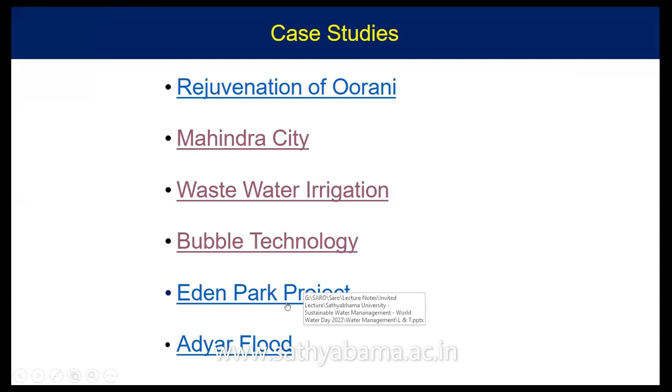I'll end with the last case study, the L&T Eden Park, which is part of our consultancy work on stormwater management. We did a feasibility study for conservation of flood discharge or rainfall runoff water generated within the Eden Park of South City of L&T, and we proposed this L&D along with the catchments of the proposed infrastructure.

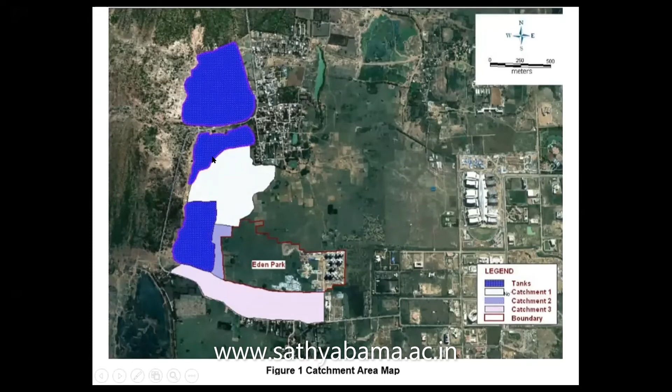There is a housing unit they want to develop, and we did a catchment length and so many other surveys, and we estimated the area and total volume of water available for each sub-area, and we recommended conservation measures.

These are the points we recommended within Eden Park to harvest the water, and these are sumps where we harvest and store it, then pump it back to the system. These are the recommended infiltration techniques, like trenches, where along the trench you'll have infiltration and so on.

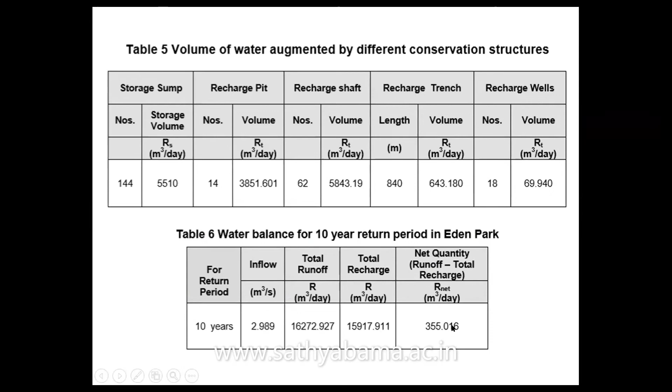So finally, the net quantity of water being recharged from the total runoff is 355 cubic meters per day that will be recharged. Almost the total runoff becomes total recharge. If you see here, a reasonable amount of water is being recharged.

So with this, I will come to the conclusion. Not only general practices are sufficient to manage water; the engineering approach is highly useful for managing water in recent days. You must have system accountability in terms of how much water you are going to get, and a DSS, decision support system, is highly required. Smart distribution of water is required to minimize the demand-supply gap through simulation, optimization, and recent technologies like remote monitoring, automation, AI-based irrigation, or water supply distribution. Then conventional techniques like rainwater harvesting, Ooranis, tanks, and the IWRM concept.

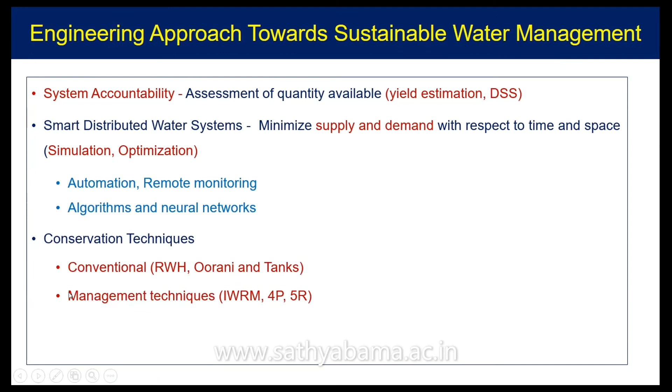If you don't do these conservation techniques based on conventional methods, you must depend only on the technical background—advanced membrane technology, for instance. So basically you need to have a water footprint to have better water management. Not only do humans require rest to replenish or refresh their body, but the earth also requires rest sometimes to recycle or replenish the hydrological cycle in its own way.

So with this slide, I will stop my presentation. I think I have taken 15-20 minutes extra. Sorry for the delay. Thank you all.

But it is very wonderful, sir. Thank you, sir. Thank you, sir.

Thank you, sir. The session is now open for queries. If there are no queries, actually, I just want to interact with sir. I think for now there are no queries in the chat box. Okay, actually before...

Interacting with Saravanan sir, I just want to say it is very wonderful, sir. You have given everything in a nutshell—a real eye-opener. With the case study, even I got 2-3 ideas. I am not at all into water research, I am a pure marine biologist, but even I have some idea. Even I want to implement the same in our university with Packialakshmi ma'am. That's what came to my mind. Thanks for the beautiful presentation, it's very informative too, not only beautiful.

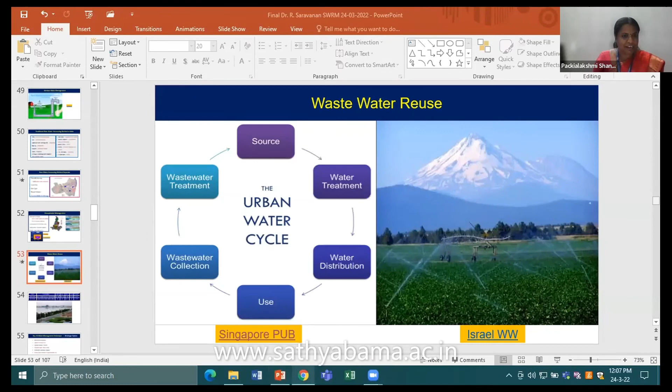So many industries are just extracting the water. See, water under the ground is a common property resource, but those who are well off can take any 1,000 feet or 2,000 feet borewell, extract it, and do the business. It's a private business. And then the reject water, you know very well, that is science people, so the reject water, the nature and quality of it without any treatment, just like that. Because of this, the entire environment-related area is getting saline.

So while conducting my social survey, people used to tell me, some 20 years before, we used our groundwater for milk boiling or all the cooking work. Now we can't use our groundwater as such. Exactly, because of this unscientific way of dealing with technology, it also causes this.

Thank you, thank you so much. There are no questions, I thank you. Sir, one more question, sir. Sorry sir, one more question.

Actually, the other technology you mentioned, the bubble top technology, yes, for that. Bubble technology, yeah sir. Actually I just want to know the cost of that. You showed the slide, but I just want to have, again, I need some highlight from you, sir. Yeah, but see, basically the plant doesn't require pouring. The plant never requires it directly; you need to pour the water on the plant or on the root.

The plant actually requires moisture for its growth. The moisture can only be fed by small droplets, which we have to create. This is a project done by my agriculture students for urban agriculture activities, like day-to-day harvest of tomato and other things, and we had good results.